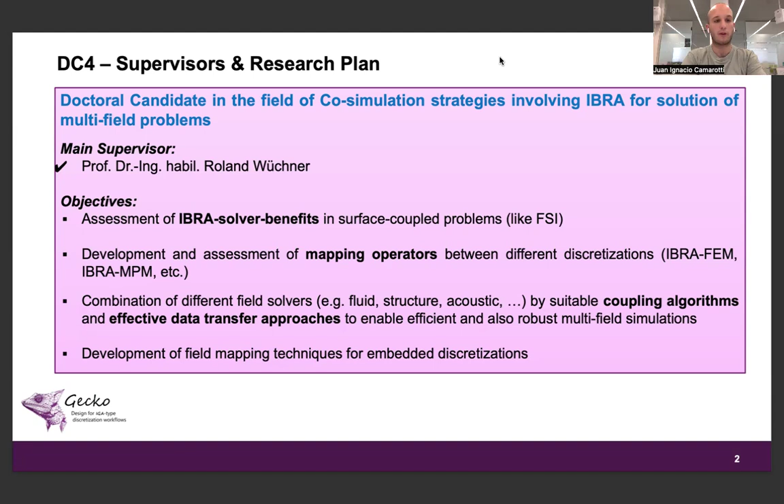When it comes to solving coupled problems, there exist basically two different approaches. On one hand, the monolithic approach, in which in each time step, all the degrees of freedom for the different subdomains are solved simultaneously. This has the major advantage that this is a very stable and robust formulation, but on the other hand, it has the major drawback that it's very difficult to reuse existing tools or to combine different solving strategies for each domain.

On the other hand, in the partitioned approach, basically both subdomains are solved separately, and the data is exchanged between the solvers in terms of boundary conditions, basically what are called mapping operators. This has the major advantage that it allows to reuse existing single field codes for solving multidisciplinary problems. This is basically the cosimulation philosophy. And this gives the possibility to employ the best numerical technique and best discretization for each domain.

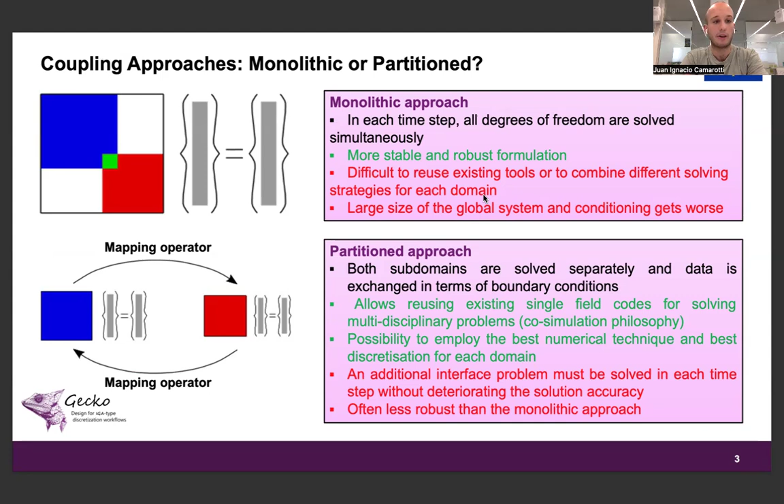On the other hand, the partitioned approach has the drawback that in each time step, in order to satisfy the coupling condition, it's necessary to solve an additional interface problem without deteriorating the solution accuracy. So that's something to bear in mind in partitioned approaches.

Now I would like to draw your attention to the different pillars of cosimulation approaches. So the first pillar is the synchronization between the different solvers, so the coupling algorithm and the strategy. And in this regard, you can differentiate Gauss-Seidel solvers, Jacobi solvers, and the use of convergence accelerators basically for speeding up your simulations. Then the second pillar is the data exchange tool you use to transfer information between the different codes. And the last pillar is the data transfer between the different discretizations, for example, mapping techniques.

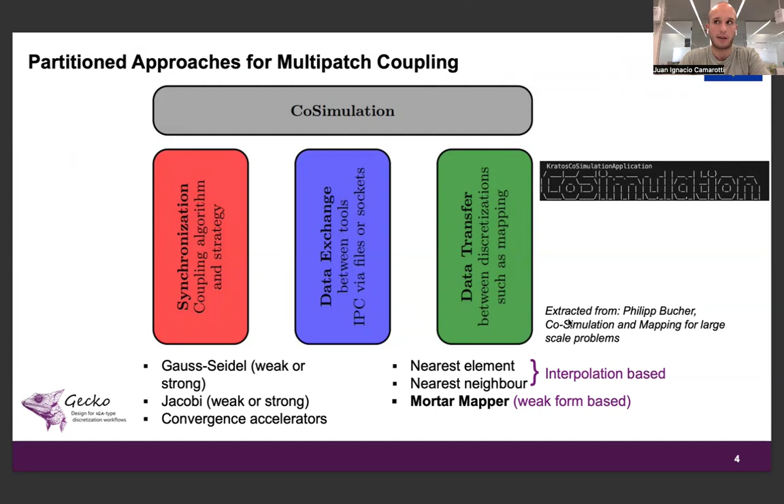I would like to say that for performing cosimulation, basically we are using the Kratos CoSimulation application, which offers all these tools that I am speaking about.

So during the first year of my PhD, I have been working on mapping operators and specifically on mortar-based mapping. So in the mortar-based mapping, the idea is basically to minimize the L2 norm error between the destination field, which is called phi sub d, and the origin field, which is called phi sub o. So basically, it's a minimization problem, which is stated in this expression. And to find the minimum, you need to derive this functional with respect to the degrees of freedom living in the destination domain.

So at the end of the day, basically, you need to solve a linear system of equations, which is stated in this expression, to obtain the mapped degrees of freedom in your destination domain, having as information the origin degrees of freedom.

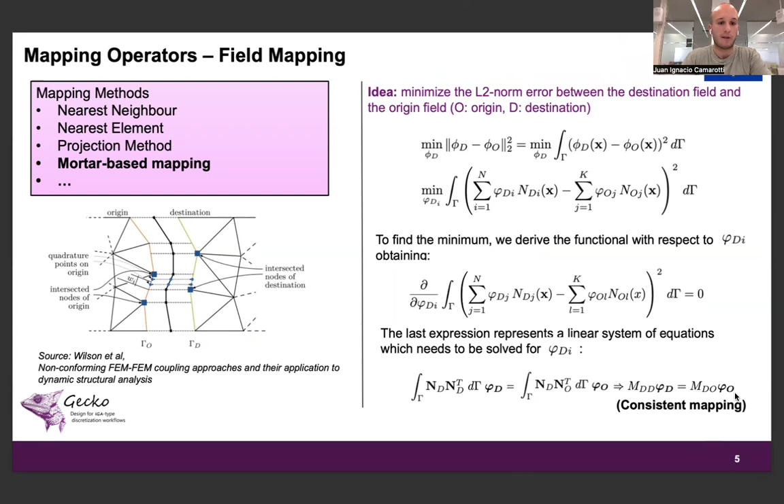So basically, I have been working on mapping approaches both for 1D domains and 2D domains for solving multi-physics problems. When it comes to multi-physics problems, one of the most common is fluid structure interaction, and specifically partitioned fluid structure interaction. In an FSI problem, you have your fluid domain and your structure domain, and they are coupled. The coupling is because you need to transfer the forces from the fluid to the structure. These forces will deform the structure, and this deformation has to be transferred back to the fluid so as to reflect the movement of the structure.

In this case, the kinematic and dynamic coupling conditions we need to satisfy on the wet surface are basically the equality of displacements or speeds and the equality of pressures or normal tractions on the wet surface. In order to perform FSI simulations, there are basically two approaches. One is the body-fitted approach, which is prone to very large deformations when the structure moves. In this case, you change the fluid domain to reflect the movement of the structure. The second approach is the embedded mesh, in which you put your structure in an embedded mesh and solve your FSI problem in this regard.

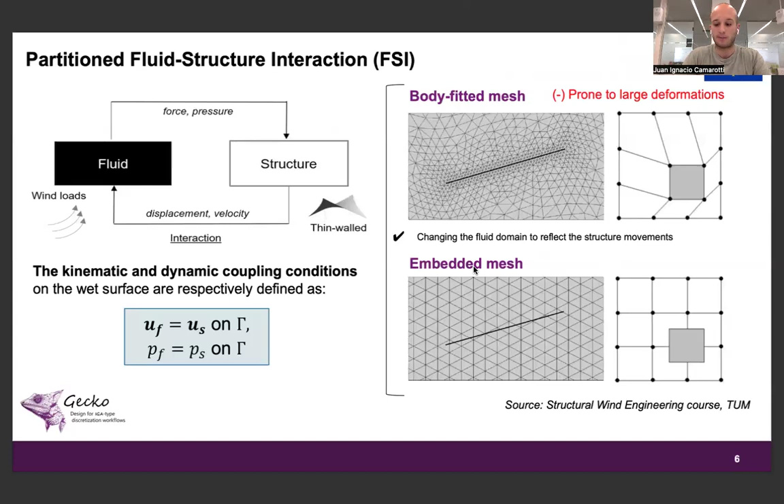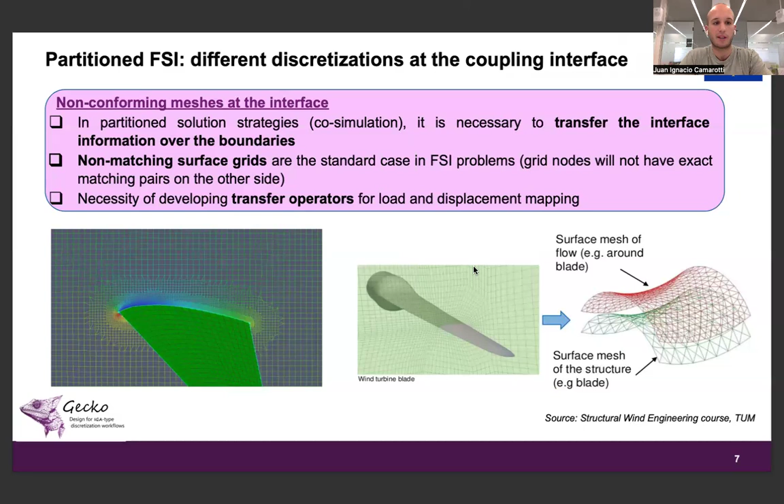Something important in FSI problems is that the normal case is that you have different discretizations at the coupling interface. So you need to develop some kind of data transfer operator in order to transfer the load and displacement between the different subdomains. And this is where the mappers come into place.

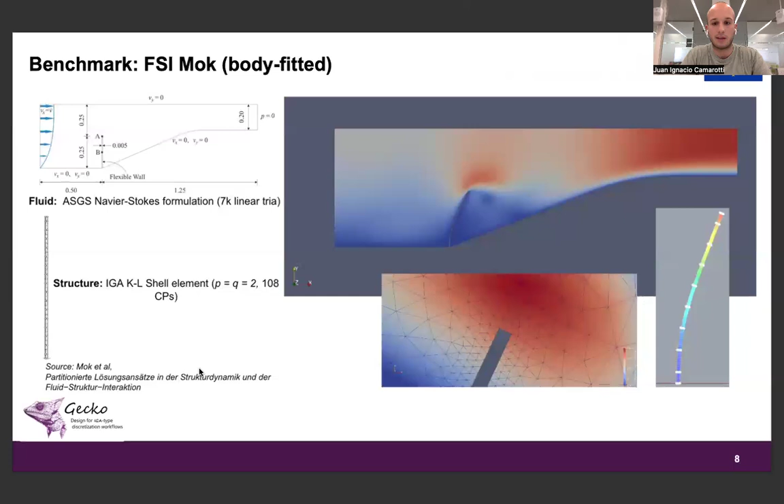Using the 1D and 2D mapper I developed, we were able to simulate different FSI benchmarks, like the FSI Mok, which I'm showing here, in which we have a finite element discretization for the fluid and an IBRA discretization for the structure. We obtained very accurate results for this benchmark. Then we analyzed another typical FSI benchmark, the FSI Turek problem. In this case, we also use an FEM discretization for the fluid domain and an IBRA discretization for the structure.

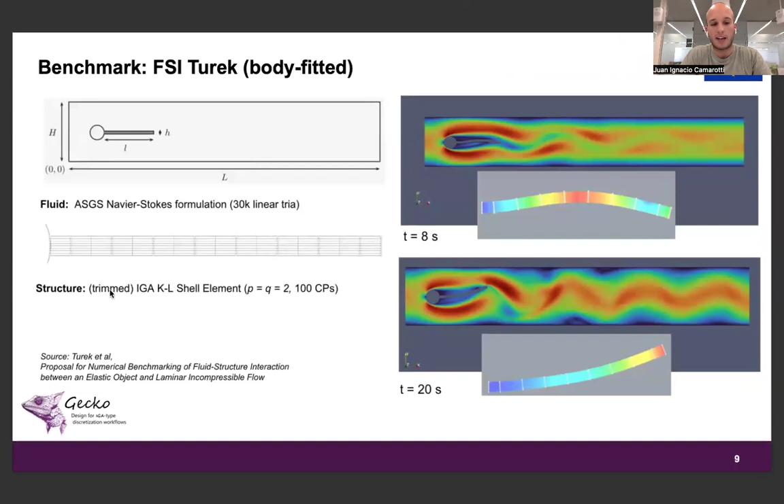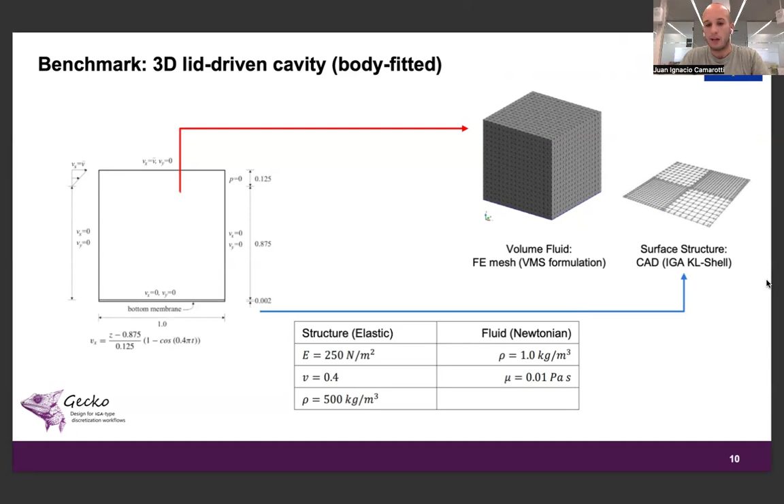We were also able to simulate three-dimensional problems. Here I'm presenting a very famous benchmark called the FSI lid-driven cavity. In this case as well, we have FEM discretization for the fluid and IBRA discretization for the structure, and we use Kirchhoff shell elements for this simulation. We were able to obtain very accurate results in this simulation as well.

Now I would like to finish my presentation talking about the future outlook for my research. As I come from an aerospace background, I would like to apply all my research to the CAD-integrated aeroelastic analysis of aerospace structures. For this, you need different ingredients, which we already have, but we need a way, basically the co-simulation approach, to combine all these ingredients to perform this kind of simulation. We need isogeometric structural elements, which we already have in the Kratos IGA application. We need a fluid solver like Kratos or OpenFOAM.

Then we need technologies to couple different patches in IGA structures. Then we need mapping operators, which was my work during the first year of my PhD. Then we need the coupling algorithms, and data exchange between the solvers. These are all the ingredients we need to perform this kind of partitioned FSI simulation, which is of high interest in the aerospace industry.